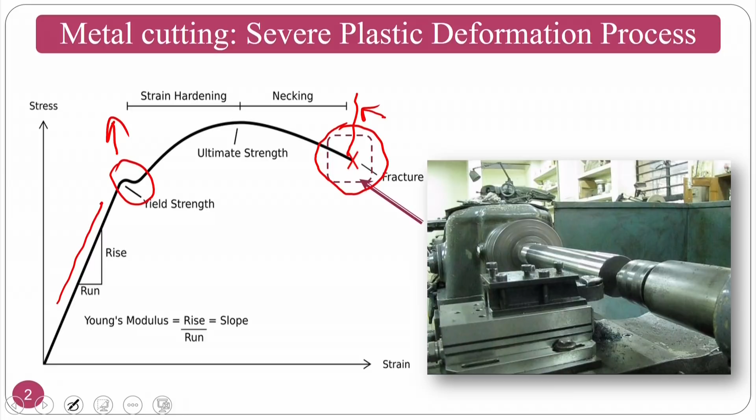If you see the yield strength of the workpiece material in the previous slide, if the yield strength of any material increases, the forces required will be very high. That's why the metal cutting process is good if the material's yield strength is less. But if I want to machine higher yield strength materials, I have to choose appropriate tools whose hardness, yield strength and other properties are much higher. That is what the first point says.

The second point, harder materials are difficult, already explained. If the workpiece is much harder, there is another concept called hard turning or hard machining operations, where it is difficult to machine because there are few varieties of tools, ranging from HSS to diamond. So you have to choose among those. If you want to machine CBN, you don't have many alternatives, because CBN itself is one of the hard materials. So what I mean to say is it is easy to machine less hard materials.

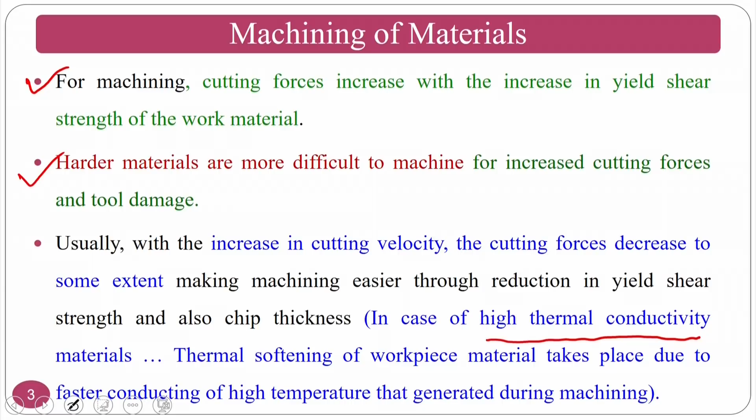Usually with the increase in cutting velocity, the cutting forces decrease. This is particular to those materials. In case of high thermal conductivity materials, assume this is the workpiece material with very high conductivity. What will happen if I am cutting with high cutting velocity? The workpiece rotates at very high speeds.

If it is rotating with high speeds, the temperature generation in high velocity cutting or high speed cutting will be very high. If the conductivity of this material is very high, what will happen? The temperature conducts at a faster rate. So thermal softening takes place slightly ahead of the cutting tool. So in that circumstance, the cutting forces reduce. That is what I mean to say.

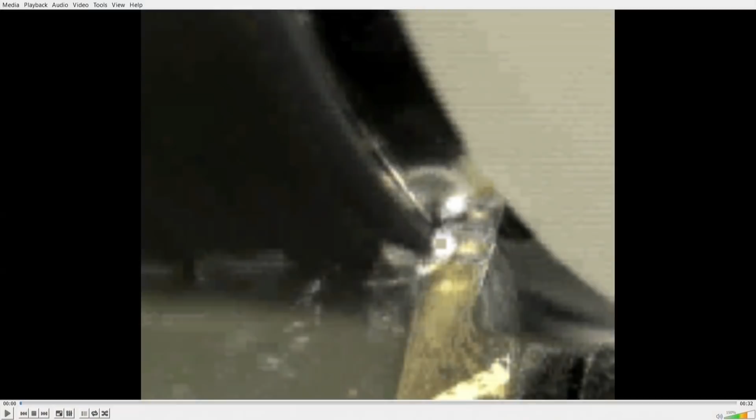Now I just want to show you a video where machining of ductile and brittle materials can be shown. In this video, you can first see what is metal cutting, what is ductile material metal cutting and what is brittle material cutting. This video clearly shows the difference between ductile material cutting and brittle material cutting. Workpiece material is removed in the form of chips.

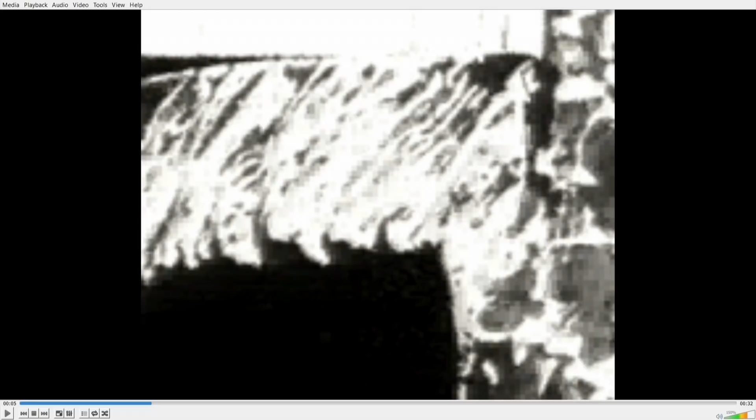Continuous chips are formed when the... You can see here, this is continuous chip cutting. So you can see there is no discontinuity, but the only thing that you can observe here is on the bottom side. Normally this is the top side. This top side is the tool in contact with the chip. On the bottom side, you can see the rough surface of the chip.

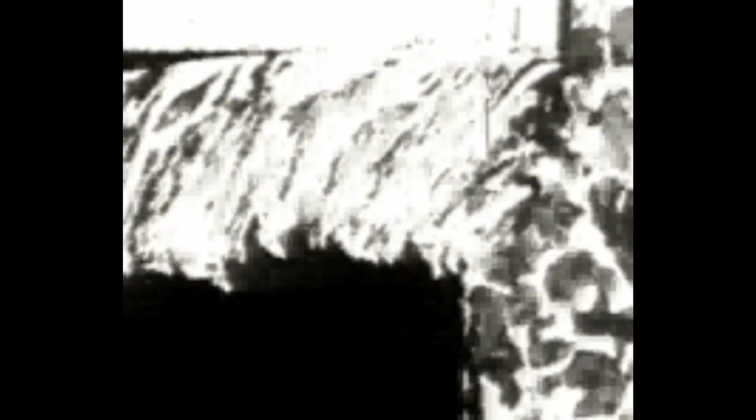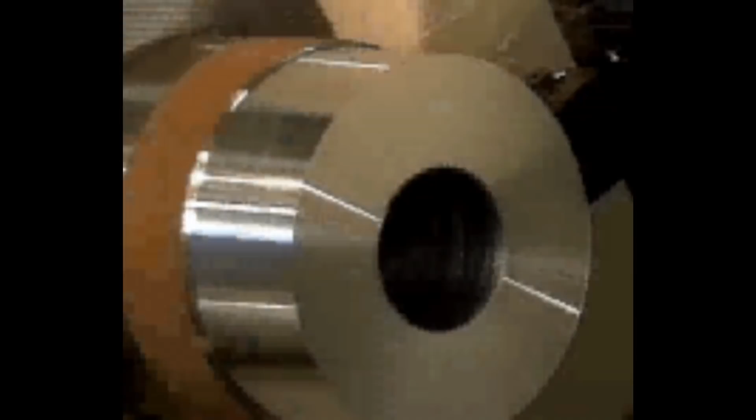Cutting tool is in continuous contact with the part, especially when cutting ductile materials such as soft steels or aluminum. A discontinuous chip is formed even in a continuous operation like turning when the material is not ductile enough to deform continuously. It fractures ahead of the cutting tool. Discontinuous chips are formed when machining brittle materials like cast iron.

Okay, just now we have seen the video. What is the difference between metal cutting of brittle materials and ductile materials? So now we will see the basic things that we have observed in the video. In the machining of brittle materials, chip separation is effected by brittle fracture, requiring less energy. Normally, this applies to some materials only, like cast iron.

Brittle fracture takes place slightly ahead, because of which there is no chip flowing on the rake surface. So the temperature generation is slightly less, which is why the point of less energy in chip formation is partially valid. The shorter chips cause less frictional force, because continuous chips in ductile materials cause a lot of friction as they flow on the rake surface, and there is no built up edge formation. You can see built up edge formation in the upcoming slides. Cast iron is one of the good examples of brittle material machining.

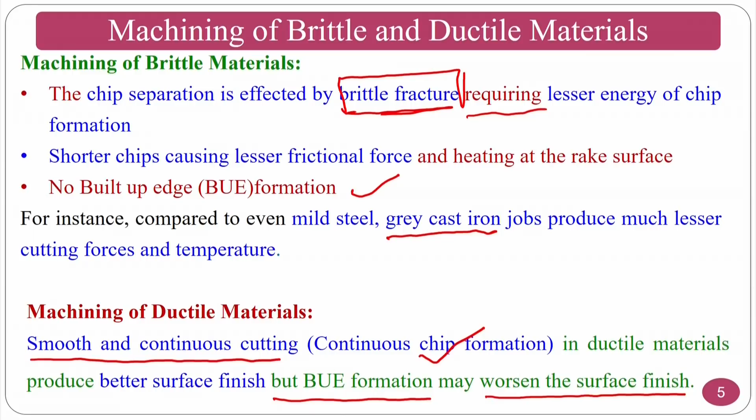At the same time, continuous chips will entangle in the machining region itself, which also may rub against the final product. This also causes the worsening of the surface finish.

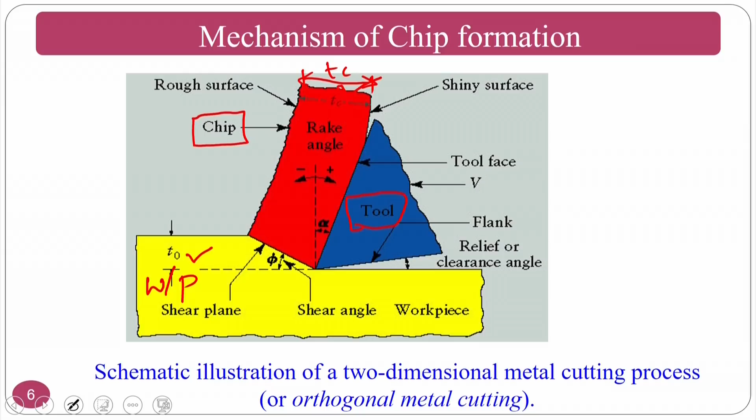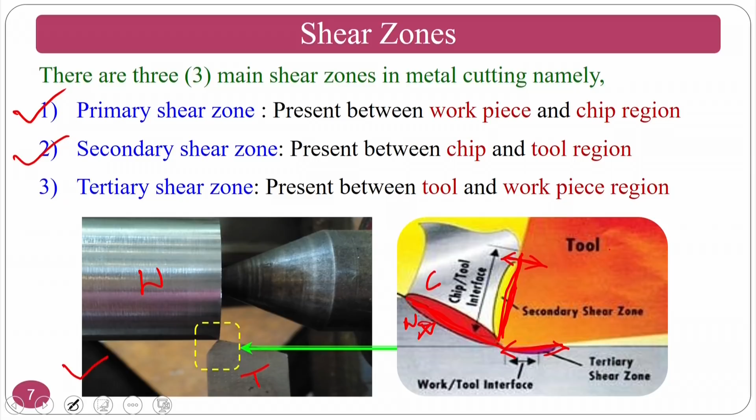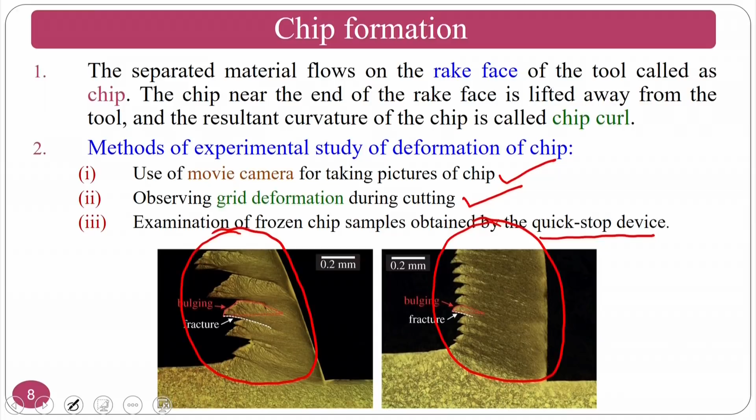Chip formation: normally the separated material flowing on the rake surface of the tool is called a chip. Okay. The chip can be measured or studied using many things. One of the methods is the movie camera technique with grids on the surface. You place the grids on the surface, move, and study. There are also quick stop mechanisms: this mechanism quickly stops it, and at that position you can study the deformation of the chip.

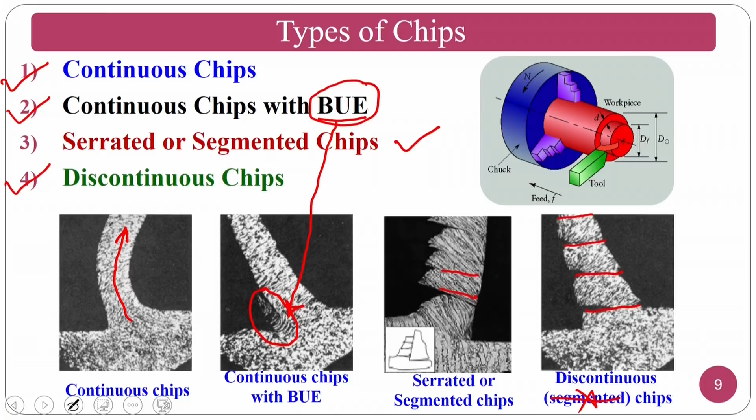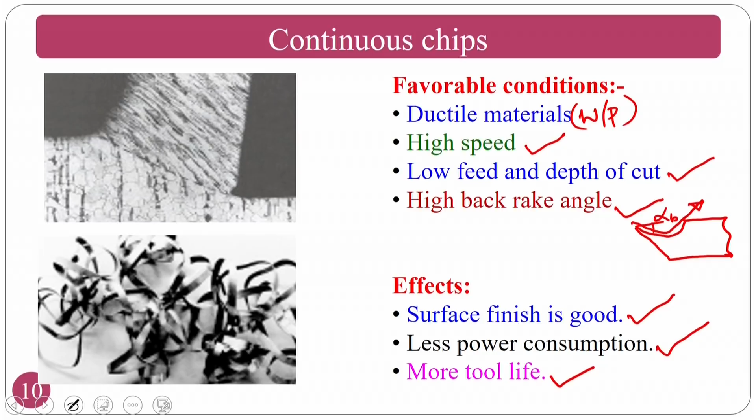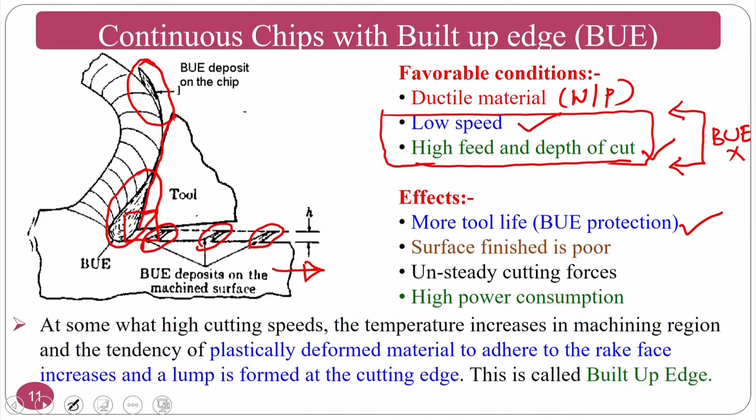Some of the papers say that the built up edge forming here will protect the tool from direct contact with the workpiece in a nano range or a micro range. That means there is a slight gap between the cutting tool and the workpiece machining point. And the surface finish is poor. What I mean to say is, I was saying more tool life because there is a gap. This is the cutting point and this is my cutting tool position. There is a gap. So here my built up edge is protecting my tool. That is how the tool life is more.

The second point is surface finish on the workpiece basically will be poor, because we need a better surface finish for a good quality product. If the built up edge fragments are welding or adhering to the workpiece final product, then the surface quality will be very poor, which we may not like. Unsteady cutting forces, because the built up edge forming here looks like a semi solid or a liquid type of thing, because of which this is a solid, this is also a solid, and in between you have a liquid or a semi solid.

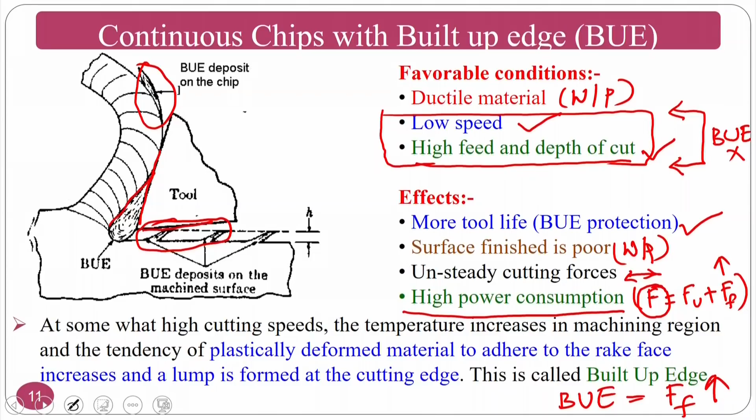The required force F equals the useful cutting force plus the unuseful, or frictional, force. Because of built-up edge formation, the frictional force goes up, which means the required force goes up. That's why high power consumption takes place. This is in comparison to continuous chips; it's not that we require very high power, just that, relative to continuous chips, a built-up edge needs slightly higher power. Okay, so that's about this one.

The third one is segmented or serrated chips. These are non-homogeneous and semi-continuous chips. They are neither continuous nor discontinuous; normally you get something in between. Low thermal conductivity and high strength exhibit this behavior. If thermal conductivity is low and strength of the material is high, this behavior appears, and it is associated with difficult-to-machine materials and high speeds.

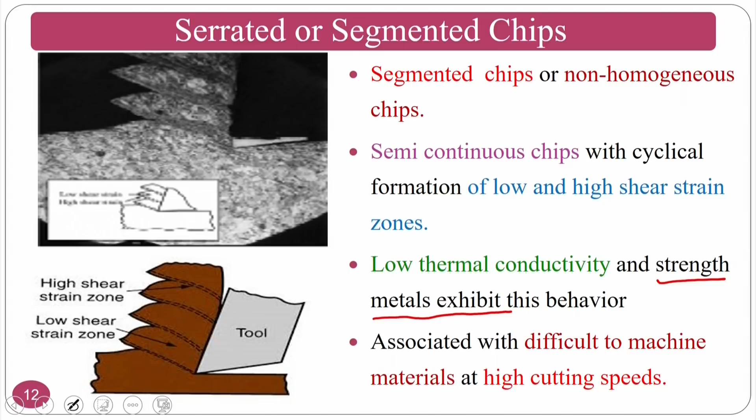Discontinuous chips are very common in brittle materials, like machining silicon carbide, glass, or other such materials. The common example is cast iron. If you are machining cast iron, you will normally get discontinuous chips, and the favorable machining conditions are low speed, high feed, high depth of cut, and low back rake angle.

What I mean is, if your speed is low, your temperature generation is also low. With high feed and high depth of cut in cast iron, it will lead to particle-type chips. That is the discontinuous type. These are very good from the operator safety point of view.

In continuous chips, the chips entangle there itself. Once the chip comes off the cutting tool, it curls, and it may touch the workpiece and damage it. For that reason the operator sometimes tries to pull it out so it won't damage the final product. In those circumstances it is slightly dangerous to the operator, because the chip is very sharp and very hard, so handling it is problematic and it may hurt. That is one of the problems.

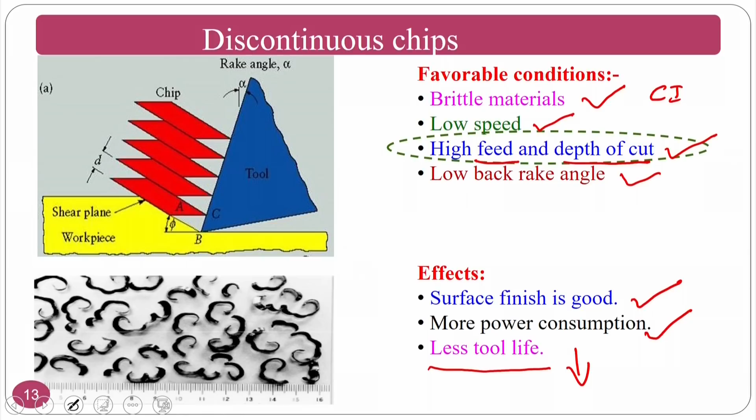So as I said, from the operator point of view, continuous chip is not good, because it may hamper the operator's hand and it is high temperature. For that purpose, the researchers came out with some alternatives; one of them is nothing but the chip breaker. If you see the chip breaker, this is the alternative.

Just on the tool, this is the tool, on the tool you just have a chip breaker. Whenever the continuous chip flows on it, it will encounter here and break into pieces. So the beauty about this one is, in a continuous process, your process is generating continuous chips. So your power consumption is low, and you are getting a better surface finish.

However, for the safety of the operator and to prevent the entanglement of the chips on the surface after machining, if you put a chip breaker, you are converting them into discontinuous chips. So that is the beauty about it. The process produces continuous chips, which reduces the force required, indirectly the power requirement, and gives a good surface finish.

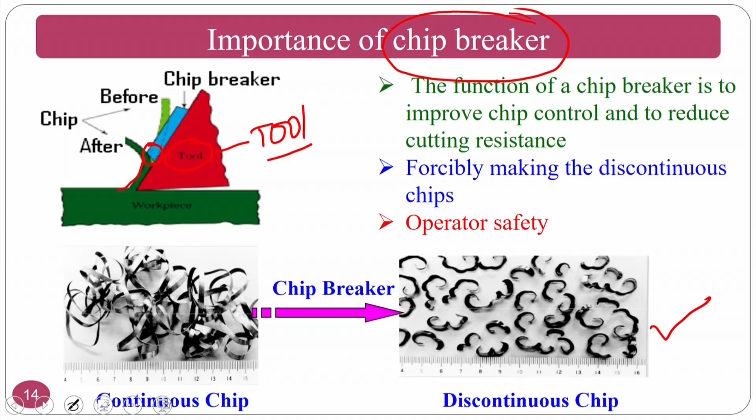At the same time, from the operator safety point of view, and to avoid entanglement of the chip on the final product destroying its surface roughness, we are making discontinuous chips. So this is about chip breaker uses. However, there are other methods also which can break the chip. Chips can also be broken by changing the tool geometry.

If you change the tool geometry, you can also get tightly curled chips. You can see the tightly curled chips coming here, and chips hitting the workpiece. If you have a straight rake, normally curls are coming. If you generate some geometry on the rake surface, the chip hits the workpiece and breaks. Because of the slight geometry variation, the chips hit the initial workpiece and break.

In another case, a continuous chip moving radially away; here also this is a geometry. If you generate another one, here the chip hits the tool shank. In figure B it is touching the initial workpiece; here it is touching the tool shank. Shank is nothing but this particular region, and it breaks off. So you can play with the geometry of your tool where the chip is moving.

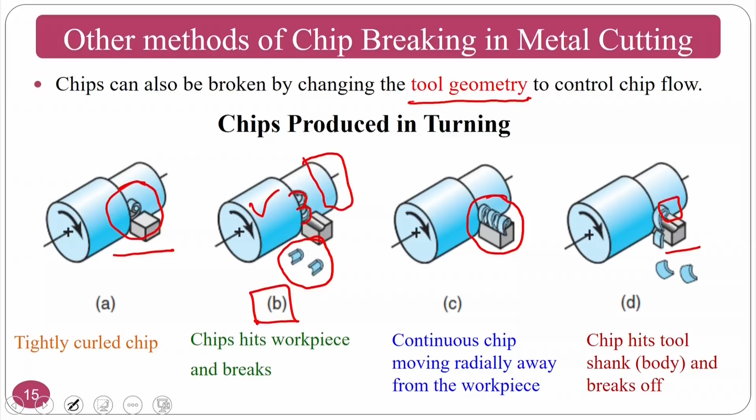Normally the chip moves on the rake surface. So if you play with some geometry on that, it can hit the initial workpiece, but it should not hit the final product. It can hit the initial product which is to be machined, or in another case it hits the shank of the tool and breaks. So these are the two conditions. If we change the geometry of the chip-tool interface region, you can enhance the chip breakability.

Similarly, this schematic is done from the experimental point of view from our papers. This is the workpiece-tool interface, the machining region, and the chip is moving on the cutting tool, because of which there is a sticking region and a sliding region. This picture is three-dimensional, but we are seeing it from the top view, so there is no third dimension visible here.

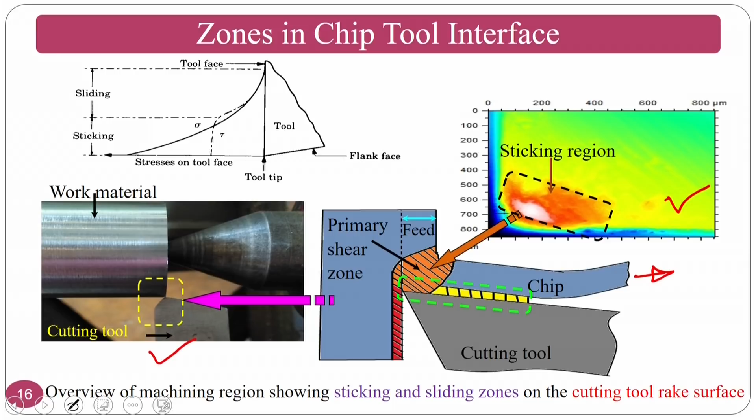So there are two regions, a sticking region and a sliding region. You can see the sticking zone and sliding zone. We have taken this from our own laboratory experiments for demonstration purposes. Some things can be explained by doing experiments in the workshop or laboratory, and teaching according to that always gives a good feel.

So that is what the teaching is about. So it is a combination, you have to bring some of the research results to show better pictures. So in that way, if you see this picture, this is called the chip tool interaction region. Normally this is nothing but the chip tool interaction region, where you have a sticking zone.

This is the sticking zone, and this is called a sliding zone. You can see it's a sliding zone. In a sticking zone, you don't find the abrading marks. These are abrading marks. You can see the chip is moving and it is abrading. That means the chip is sliding in this direction and it is creating its own marks.

This is called a sliding region, which is shown by the blue arrow, and the sticking region, because of the sticking nature, predominantly you don't find the directional scratches on it. Instead of that, you can see the material removal from the tool in the form of craters, or molten material is gone out. So this is the difference between the sticking zone and the sliding zone for the given metal cutting conditions.

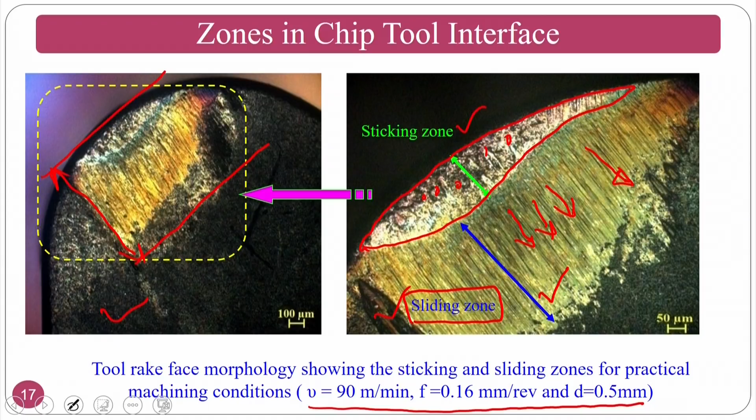These are the conditions that we have given in the metal cutting operation to demonstrate in a better way to you people for understanding what is the sticking and what is the sliding region, practically how it looks like and all those things. That was the motive for us, apart from publishing the similar works.

So chip thickness measurements: normally chip thickness can be measured using the direct method and the indirect method. In the direct method, normally you can take the micrometer or vernier calipers and measure it, but you may not get the exact value, because if you see, this is the cutting tool and this is the chip.

Normally you assume that this is a continuous chip, a segmented chip or a discontinuous chip. The basic problem is, one side it is a smooth cut, and the other side it is very rough. So if I put a vernier caliper here and here, you may not get the exact value, because from point to point the thickness is varying. So the direct method is okay, but it may not give you the exact value.

If you have sophisticated equipment, you may get it. In the case of other chips also, you can see there is slight variation on both sides, so it may not be easy to get. So the other method that you can rely on is, for example, if you are cutting a known material, you know the density of the material. Normally the density of the material is known to you.

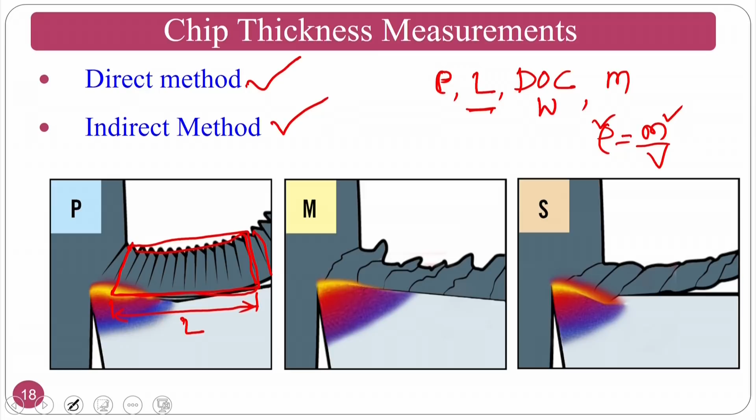So you know density equals mass by volume, where you know the mass from the micro balance, and the density of the material is constant. Now the volume: you already know the length and the width of that material, so only the thickness is unknown, that is length, width and thickness. So this is the thickness. You know the other things, so you can measure the chip thickness. This is how the indirect method works.